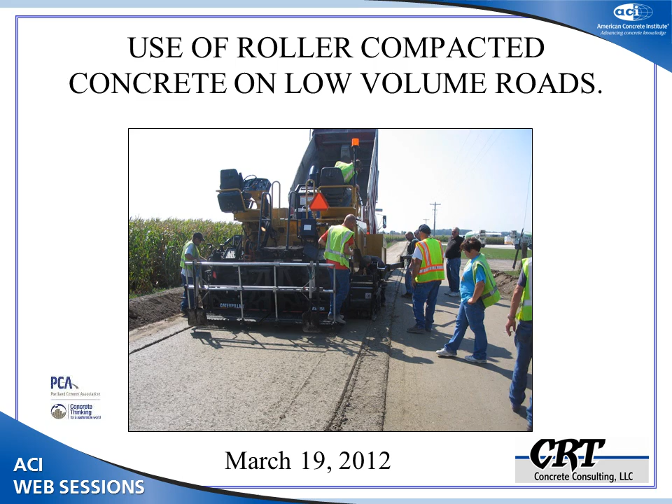We did it a couple of years ago, and I thought I'd tell you what's changed in these local projects, tell you a lot of how these projects are being developed in Indiana. Some issues that we're having some challenges with quality, and I want to be upfront about that. I want to talk about that, then talk about a couple of good projects that we have done. Indiana has 92 counties, and we have roller compacted concrete in 33 of them. So we're doing pretty well.

I'm here to talk to you about the small stuff. You've heard all about the big stuff, the port, the Corps of Engineers projects. I'm talking maybe 100 cubic yards of RCC in a day. Those kind of projects and really where that fits in and what we're doing. So that's kind of what we'll talk about.

What has changed since a couple of years ago is ready-mix producers are now interested in selling roller compacted concrete. I've had discussions with the NRMCA, the National Ready Mix Concrete Association, 2, 3, 4 years ago. They're like, man, that's not us. That's pug mill. That's not us. Well, it is them. It is them in ready mix trucks, in their central mix plants. There's been a huge development in equipment that slides underneath concrete plants.

We'll talk about that. Asphalt pricing is going crazy, and local agencies are looking for alternatives to make their money go further. Their revenues are down. Local governments are struggling, I'm sure, in your communities as well as my communities. So they're more open-minded than ever before to other ideas in how to build their local streets and roads. The other thing that's changed is the size of the maximum coarse aggregate.

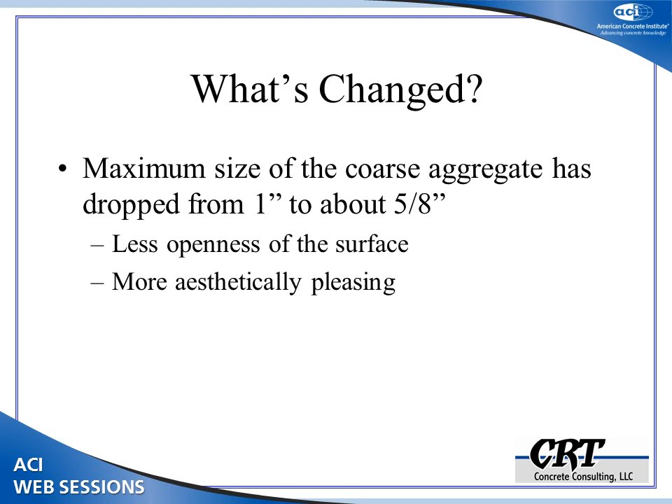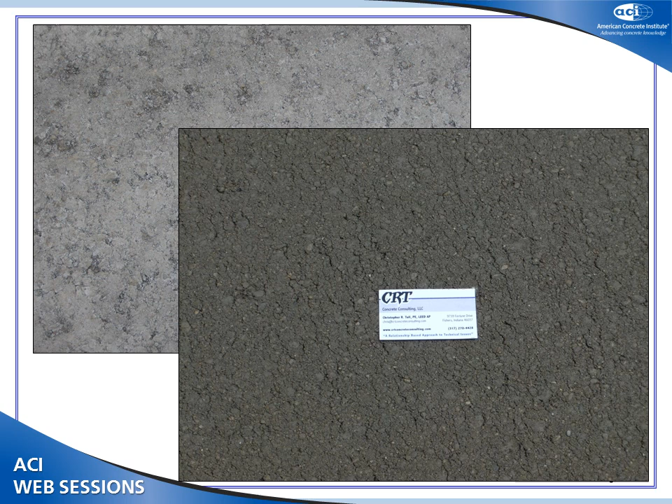What we've had in years past, that was our RCC. Now this is our RCC. So it looks a lot better. People are talking about, I've got base course mixes, I've got surface mixes. Are you going to cap my RCC with asphalt? If you are, then this is going to be fine. If you're going to leave it open, I'm going to do this. So that's been a development that's happened for us in the Midwest over the years.

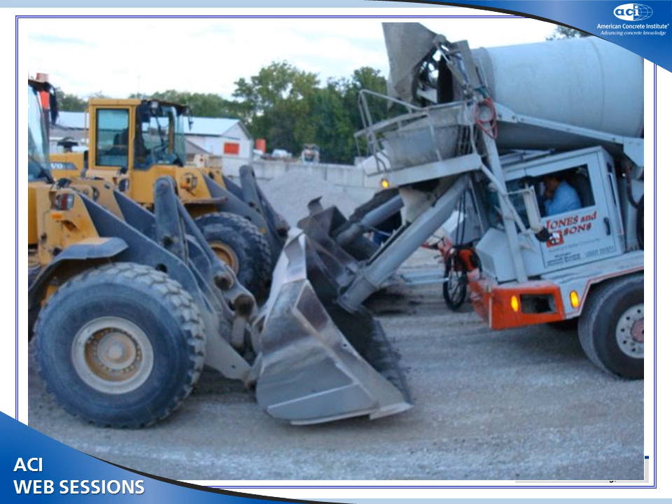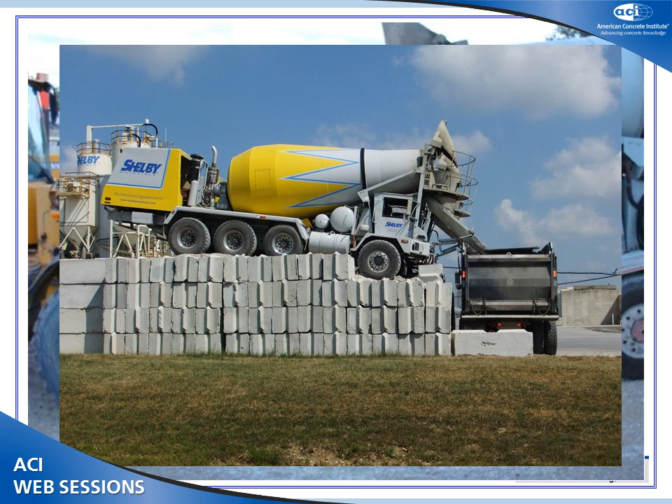Twin shaft mixers are coming into the market big time. Frank showed this picture. That's how we used to do it. It works great. Don't tell me you can't do this, because you can. Frank showed the numbers. Some of these smaller asphalt pavers are used to putting down 80, 100 tons an hour, 50 cubic yards an hour. This is certainly an option for roller compacted concrete.

So I think a lot of people, when they think about roller compacted concrete, when I talk to them, the first thing they think about is dams. How am I going to take a process to build a dam and do a county road with? Well, do you have a ready mix producer in your county? Yes. Well, then you can get roller compacted concrete, and you can get it there efficiently.

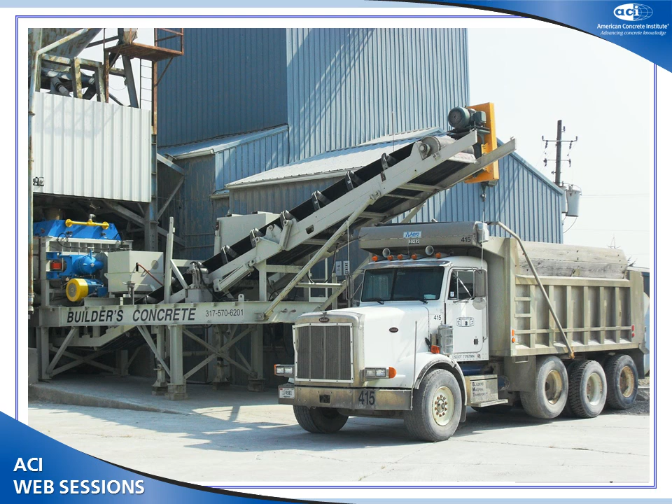But what's happening now, this is the same machine that Frank showed. These guys have got this twin shaft mixer that they hook into any dry batch plant, and it's a twin shaft, so it makes this plant into a pug mill. And 2 batches go into that truck. It's working very, very well. This is working great, but some of the guys are saying, man, I'm going to have to get inside my trucks. I need to clean them out a little more than I would like. So this is starting to come more into play.

Okay? I will say that this works great, but it's always good if your trucks have fins in them. Okay? You laugh until you look. In any concrete process, the economy has been horrendous to the ready mix industry. Frank knows that all too well. So unfortunately, in some markets, maintenance of equipment is struggling a little bit. So if you're going to do this with half load sizes, 4 or 5 cubic yards in a truck, then you need to make sure that the fins are in good shape. Okay, so I would caution you to do that.

And by the way, they do have trucks where it comes out the front. Not all of it has to come out the back. So there's that deal. That's been a change in our market. It's been very good. High-density pavers are becoming more and more prevalent. The contractors that have high-density pavers will tell you that you have to have a high-density paver. The guys without one will tell you you don't have to have one. So to me, if it's my project and I'm the specifying engineer, if the roller compacted surface is going to be the finished surface, then I'm probably leaning towards a high-density paver strictly for aesthetic purposes.

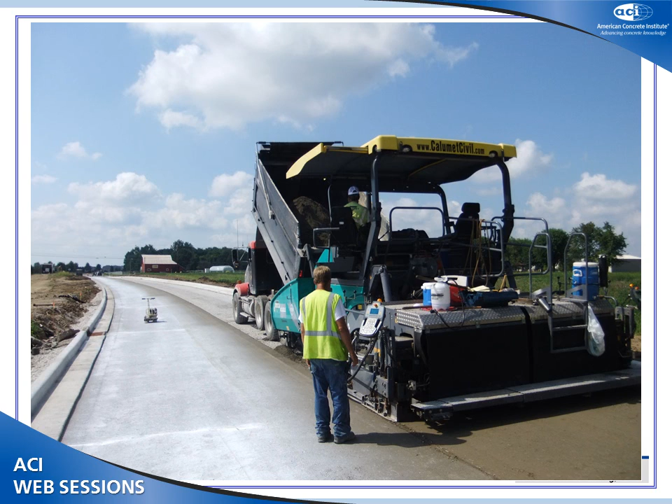Here's a good shot of a local project. You can see a fresh joint going in here. This is a project in Indianapolis with a high-density paver. You can see that hardly any roller marks are in that pavement. Okay. Here's another shot of a high-density paver on an early morning pour.

And then when you do the life cycle cost analysis, then you're going to see over the life of the pavement, when your great-great-great-grandchildren drive down that road, it's going to be working great. And the guy says, you know what, I got $500,000 to build this project, and if the cost is $500,001, it's not being built.

Fast forward a few years, we're finding that equivalently designed concrete pavements, including roller compacted pavements, the initial costs are equivalent or less than comparably designed asphalt pavements. And we're seeing that all over the Midwest. Wayne, you're seeing it all over the country.

So urge you to get some design, and a lot of people ask me, hey, what's it cost? What's it cost? And I'm like, really? I mean, why do you care what I think it costs? I'm a consultant. I've got paper and pencils. I'm not a contractor. I don't have equipment.

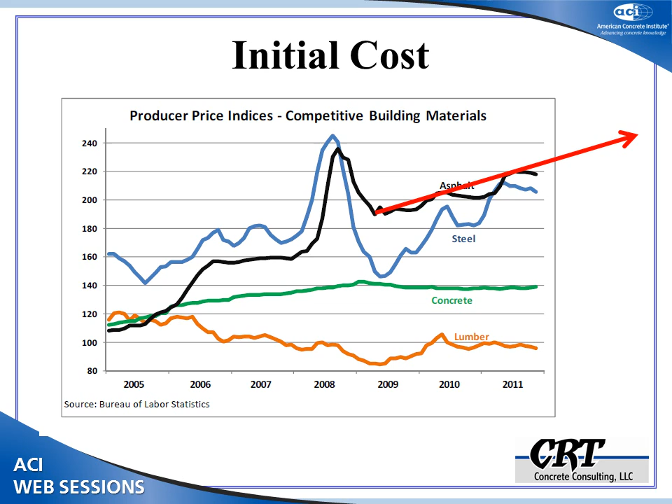So what I always tell people, I say, look, get an equivalent design. You have an asphalt design. I'll help you come up with an equivalent roller compacted design and bid both. Let the market determine what's best for you. You guys are all smart. Let the market determine what's best for you and your communities and your projects.

So here's kind of a very busy letter, but this is what I do over and over again. Thank you for roller compacted concrete. I throw in the word sustainability. Everybody here's got to be sustainable, required by law, right? So we're sustainable, blah blah. Past years, life cycle costs. I do a layer coefficient analysis quite a bit. Layer coefficient analysis makes pavement engineers cringe because the science is not correct.

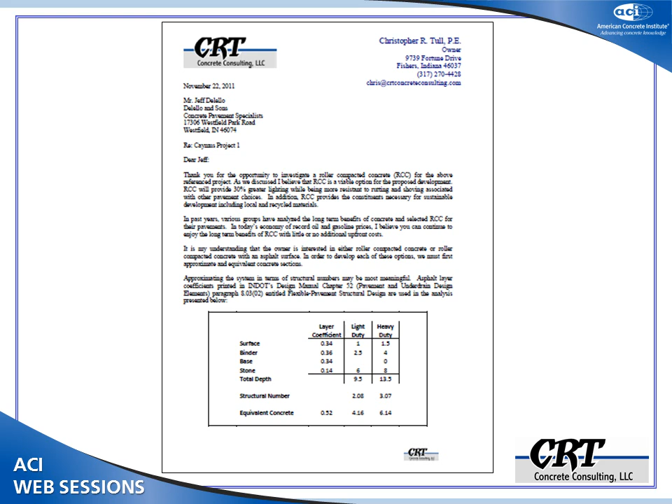And I fought this for a long, long time, and I can tell you from a local government, a county engineer, any county, local government people, they understand this. So we kind of do a layer coefficient and come up with an equivalent amount of concrete. And for a local road, about 6 inches of RCC feels about right to me. If I were to do an equivalent concrete and the answer came out to 2.5 inches, with some of these asphalt sections, sometimes it does, I'm not going to recommend 2.5 inches of roller compacted concrete.

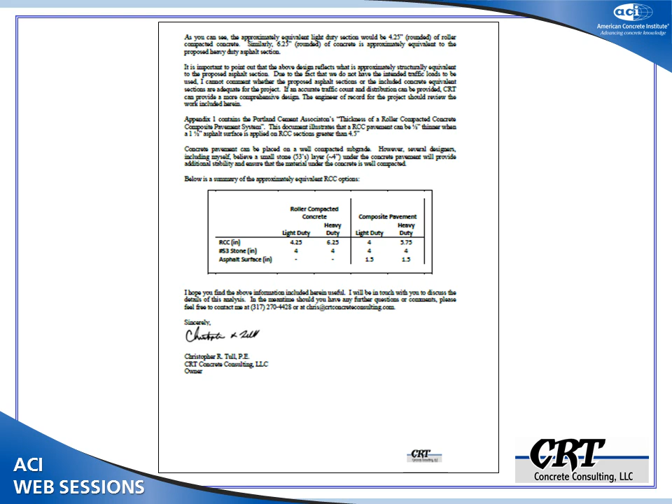So we put that together, and then we put that out, and then again we ask the guy to say, just bid both, and you decide. You decide what's best for your communities. One thing that I like is Wayne has developed, PCA has developed this document.

I talked to Wayne 3 or 4 years ago, and these asphalt contractors say, how thick's it need to be? Well, 6 inches. And they go, well, what if we put 1.5 inches of asphalt on it? I said, well, how about 6 inches? And they go, well, that's not right. And I go, well, it's probably not, but I don't understand it. So until I understand it, the answer is 6 inches.

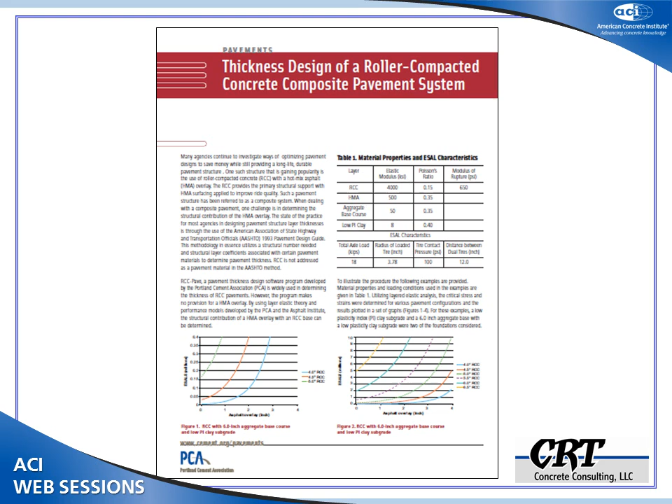So Wayne did something very easy, found somebody smarter than I am, and they developed this document that talks about thickness design and roller compacted composite pavements. Huge business, composite pavements. A lot of people like having asphalt surface. They want a disposable surface where about come election time they can mill it off and put it back and make it look good. So what kind of credit do you give for the asphalt?

Well, he did a nice job in there, and it says 4 3/4, 4 3/4 or 4 1/4, 5 3/4, 5 1/4, 6 1/4, 5 3/4. Anything that starts out talking about Poisson's ratio, you got to go to Wayne. He'll help you with these things. It looks to me that 1.5 inches of surface is about 1/2 inch of roller compacted concrete. So that's what we say.

All right, we have 6 inches of RCC. Well, I'm going to put 1.5 inches of surface on it. All right, let's go 5.5 inches. And then the issue comes: when do you put the surface on? Well, I'm not going to put the surface on until the subdivision is built in 3 years. Okay. So you're going to put the surface on when 95% of all the loads that pavement's ever going to see, the concrete trucks, the dirt trucks, the excavating, is done.

Well, I'm not going to give you credit for that. And by the way, you shouldn't in the asphalt world either, those guys that leave their asphalt sections on. So that's what we go ahead and do, and it works out pretty well. And we've been able to convert several of these projects into roller compacted concrete, largely with success.

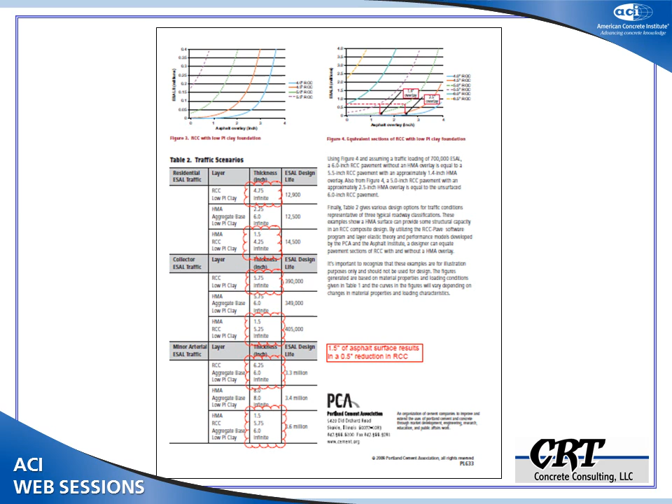However, in all transparency, I want to talk to you about some issues that we're having in and around the Midwest with some roller compacted concrete. And there are no issues when people follow the rules. When we have good contractors involved, good quality control plants, we don't have issues.

If you bend the rules, you're going to get bit, and we've gotten bit. What is the quality control program for asphalt sections? Local streets and roads, county roads for asphalt. What kind of quality control do they have? None. They have rolling patterns that they've done for years. What's the expectations for the performance of asphalt and low-volume roads?

Similarly, is none. So what we're finding is that we're working largely with asphalt contractors that don't own their asphalt plants. So they're tired of the asphalt companies sticking it to them, because they place asphalt too. Now they're trying to sell them asphalt at a premium. So they're buying roller compacted concrete, and they're going, well, we don't check the density on our asphalt. We're going to check the density of the roller compacted concrete until we understand what you're doing.

So here's a couple issues we've had. We're having issues on fresh joints. This is an entrance to a pretty big job, and we're having some damage with the fresh joint. What I'm learning, Wayne, your PCA guy says 60 minutes, right? Concrete on concrete in 60 minutes. I'm on jobs where it's concrete on concrete in 4 hours. That's what happens.

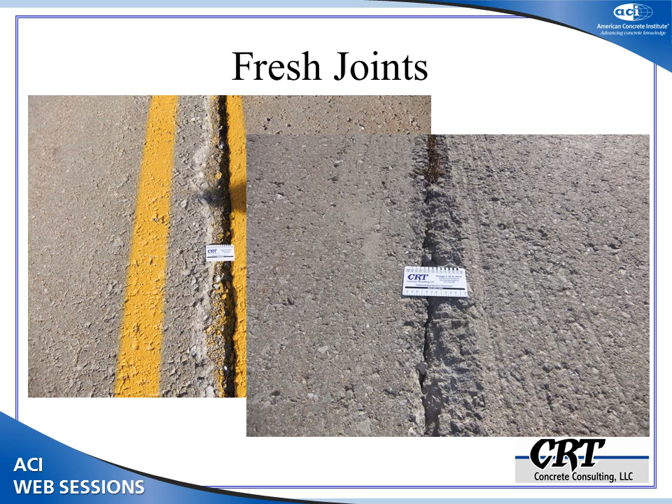We're also having some problems with the proctor. Everyone's talked about the soil method. I'm a big fan of the soil method. All the testing labs are familiar with that. We've had one producer who switched plants, instead of the north plant went to the south plant, different sand, different stone, tried to use the same proctor. Didn't have very good results. So, well, god dang, every time we change material, we need to get a new proctor? Yes, you do. You should pay some attention to that. We need to verify compaction in the field.

I'm involved in one project, unfortunately, where all the field density results are acceptable, and the field sampling cores are not. Why is that? I don't know why that is, but it's got me concerned that until I have some comfort level with a particular roller compacted ready-mix team, then I'm going to do some field verification.

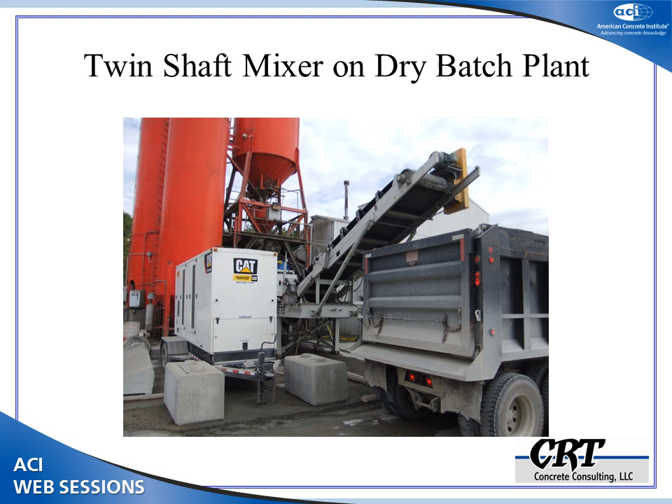So here's a couple projects, another version of these Daviess County projects that, Frank, you were up here on these things. They're coming through and doing quite a bit of these county roads. They brought in this twin shaft mixer, and again, here's a high density paver going down. Here's Jerry Larson with the Indiana Ready Mixed Concrete Association. He's been instrumental in promoting a lot of these jobs. And by the way, Jerry, former county highway supervisor, knows all these guys. You should get to know these guys if you want to do roller compacted concrete.

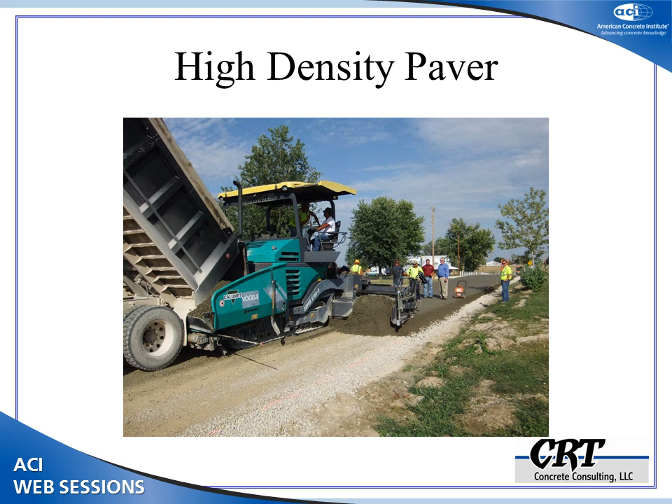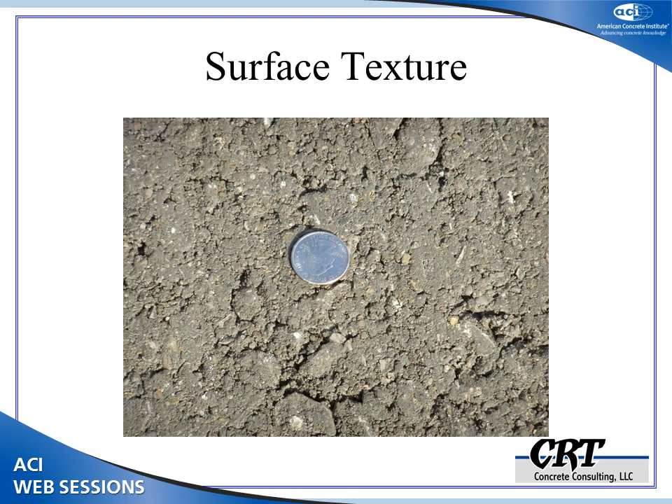A good base, good high density paver. Probably not the best job curing, but maybe better than some other jobs I've seen. There's the surface texture. Again, it's not broom finish. If you're expecting broom finish, you're going to be woefully disappointed. One recent project we did is there's a community center, and some of the guys in Indianapolis, these people needed a parking lot. So as a demonstration, we put a parking lot in for the Shepherd Community Center. Showed you that picture before.

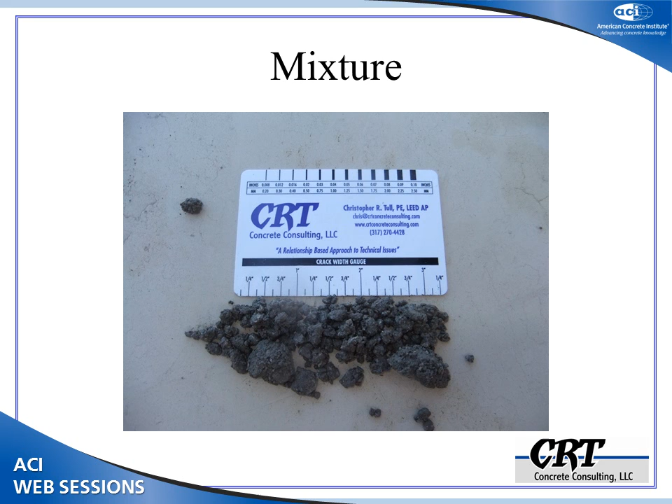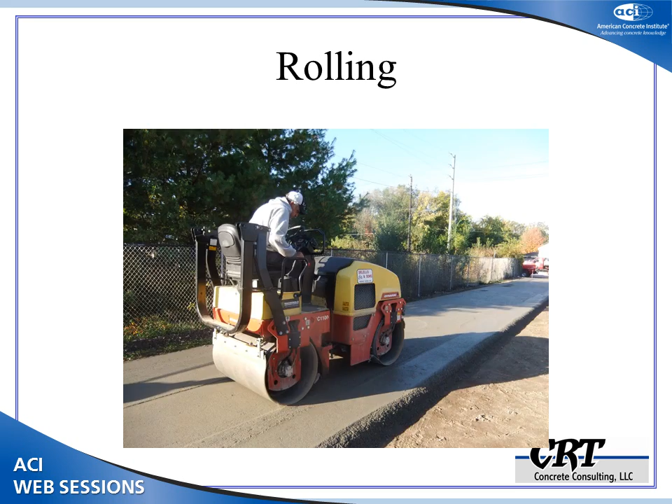Small gradation of aggregate, getting smaller and smaller for a better surface appearance, is working real well. Have the Caterpillar, it's a high density paver as well, going off with the start-off strip and then coming back in and filling in the lanes. Not a lot of roll down with these high density pavers. And it looks great. So the pavement process has really gone well. That job's been down for about a year.